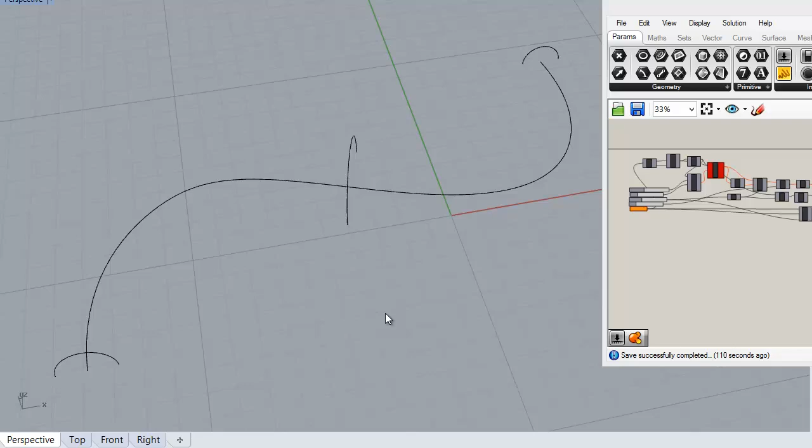Hey folks, you remember the reason I got into this in the first place was to create procedural snakeskin that was fast and quick to apply to any surface. So anyway, I've built the controller for it using Voronoi meshing, which has the nice side effect of it really looks sort of reptilian. So while it's not technically snakeskin, it definitely does look a bit reptilian.

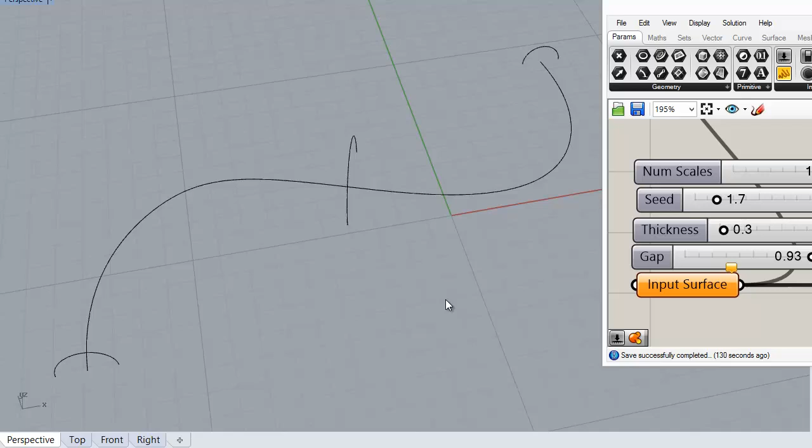Right, so let's carry on with showing you how it goes. So I'm going to just sweep one rail with these curves, and let's say that that's going to represent our snake body, lizard body, reptilian, whatever the hell it is. Alright. Of course now we need an input surface, so I'm just going to plug that in there.

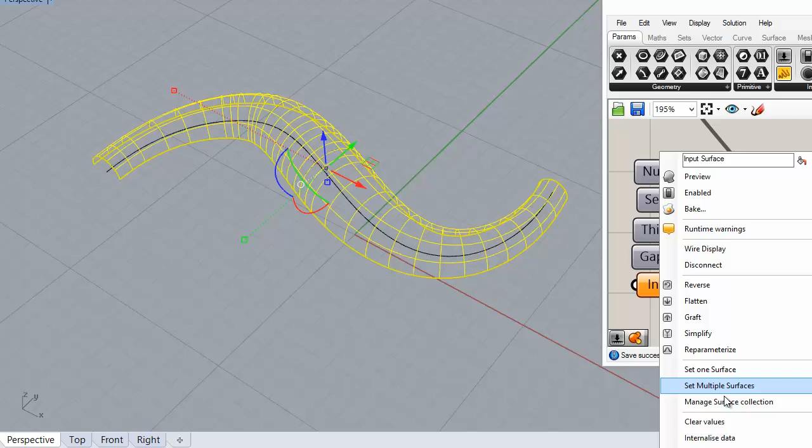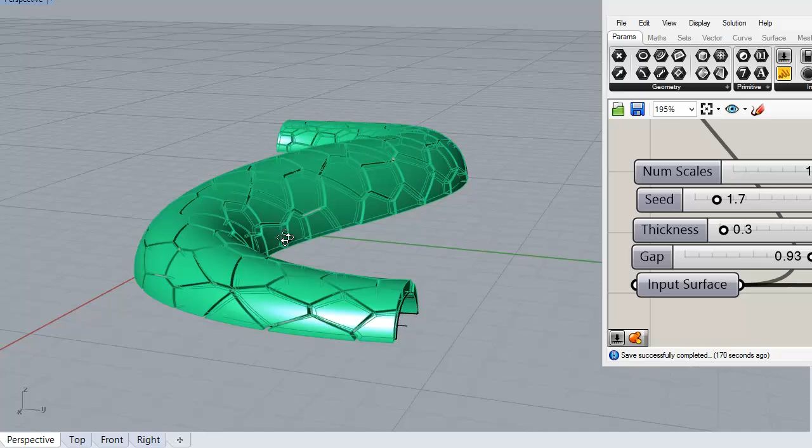Give it a second. Alright, now what it does sometimes, I'm not entirely sure how to control this, is if it flows it towards the inside, just flip the direction of your surface so it flops it around the outside. Alright, and I'll give you a little bit of info about how the builder works.

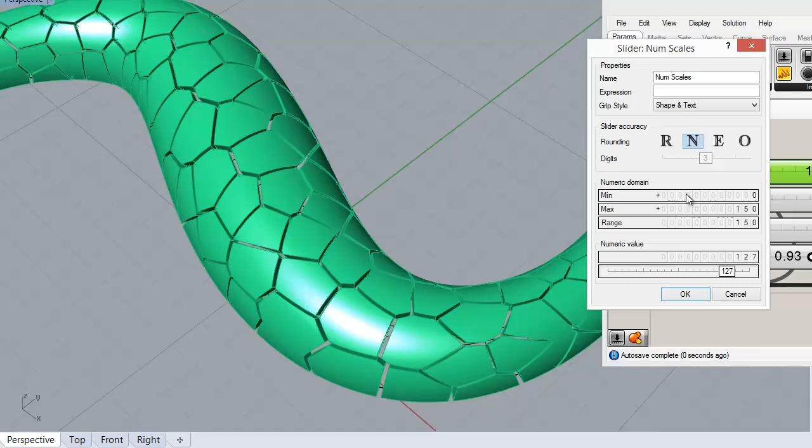So of course the number of scales is the important thing, but the more scales you use, the more work there is and the slower this builder becomes, so you need to just be a little wary of that. I'll show you what I mean. So if we set the maximum range for this to 250 and then try to drag this up that high,

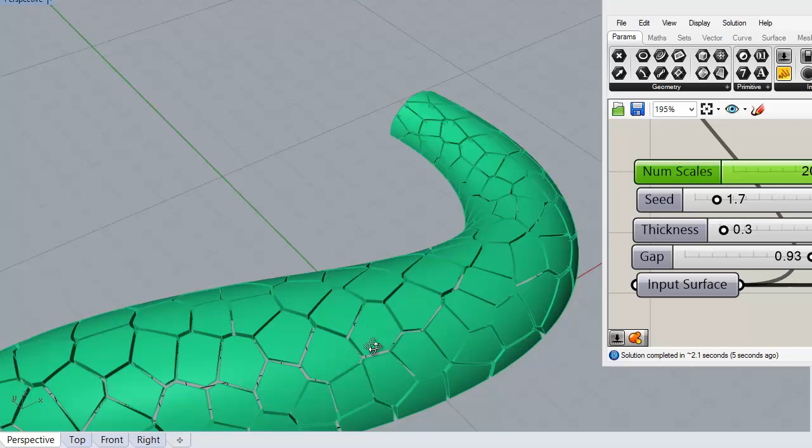it is going to get nicer in that you're going to get far more scales and it's going to definitely look a lot more snaky. But of course, because now there's more bits and pieces that have to play the game together, everything's going to be slowed down a lot.

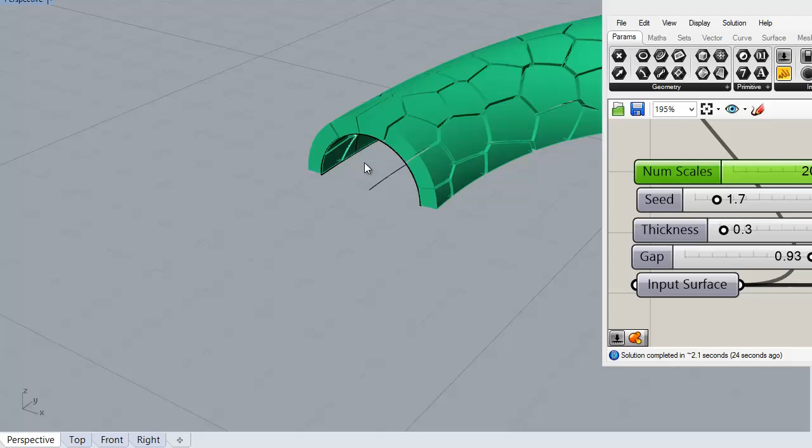Alright, so anyway, other parts of this controller is thickness, so you can determine the thickness of the build, and then a random seed, which will just randomly draw these lines in different directions. I'll see if I change it to something else. If you watch what happens on the screen, you see it just changes the way that it's drawn. Come on.

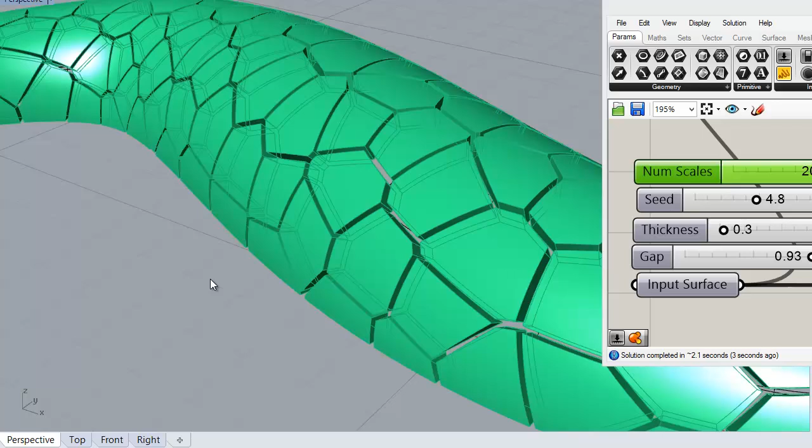It's literally just, for those of you who understand random seeding, this is just a different seed for the way that it lays out the initial grid that it's using to create this procedural snakeskin, or reptile skin, whatever the hell it is we want to call it. And then of course there's the gap. The gap works on a percentage of the original size of the scale. Each scale is represented as 100%, and at the moment the gap is the scale multiplied by 0.93.

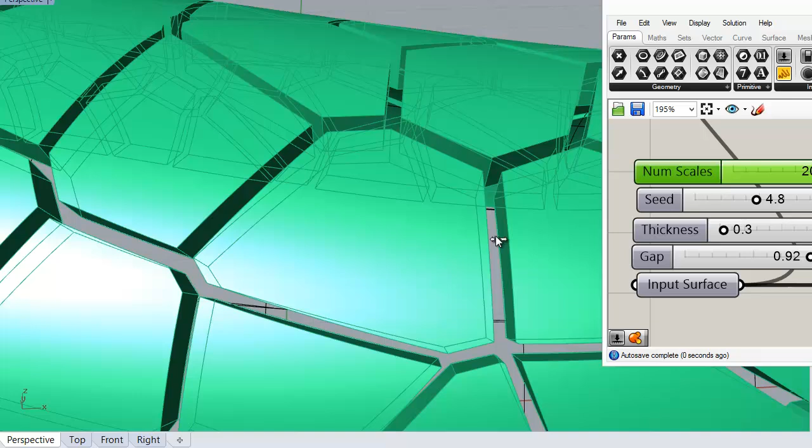So if I bring that down, the gap's going to get bigger. So you may want more gap, less gap. You might want to take it over to 3D Coat to give it a wish wash and make it look more sort of, I don't know, reptilian, whatever the hell it is that you're after. For the projects that I built this for, it works beautifully.

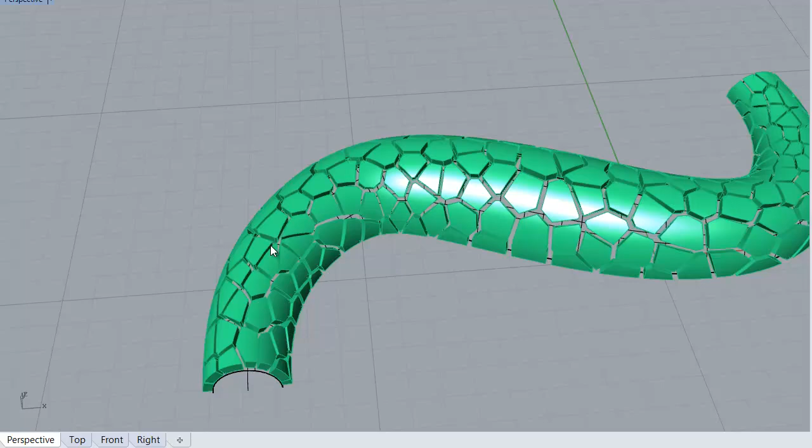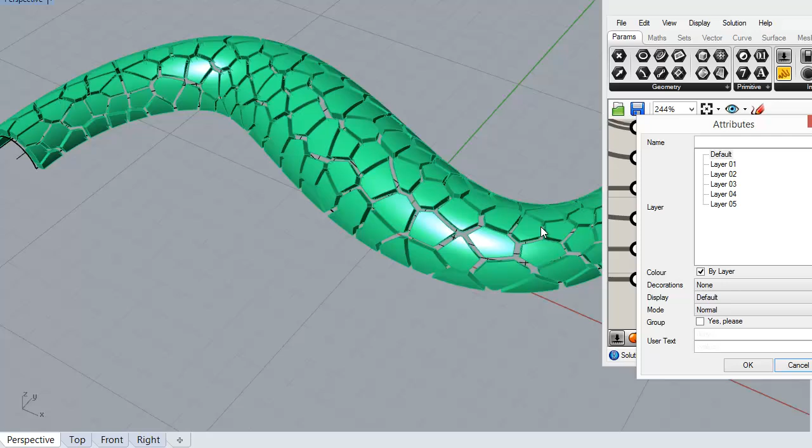Okay, and you get a nice random organic. When I say random organic, if that's even a way of saying anything, you've got something that you can work with that looks organic, although it's procedurally drawn. Anyway, so it was a bit of fun playing with that. Let me bake this so you can have a look at, let's bake those goods and close this down.

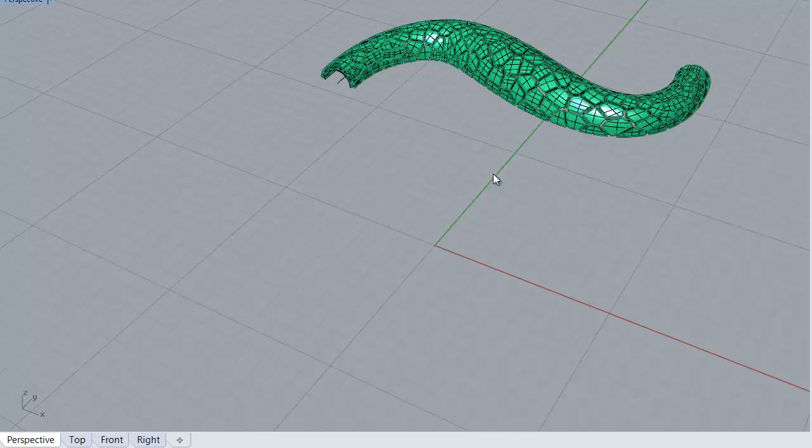File, let me just save that document and close this. Right, let's grab our goodies out of there. Come on. I moved my surface. Let me just move my surface away in a second. Of course, what it's done is it's moved my made up scales along with what I just baked. So let the made up scales just run away quickly. Alright, and then there's your Rhino scales.

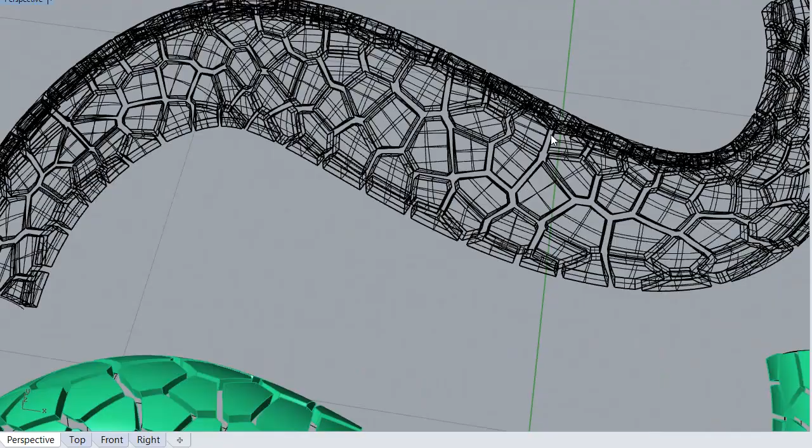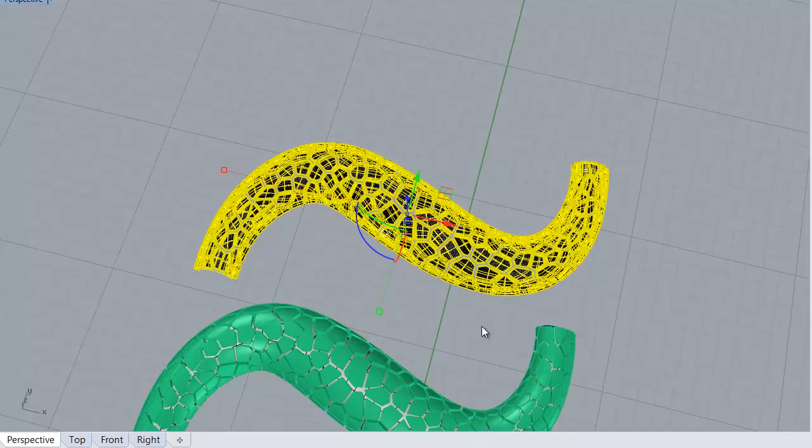So you could take those into 3D Coat now and you could give them a bit of a wish wash. You could try meshing it out in Rhino and see how you go. Let's have a look if Rhino Smooth will even that out. I haven't actually tested this myself. I literally finished this a couple of minutes ago. Okay, let's dump those and let's run a Smooth on them.

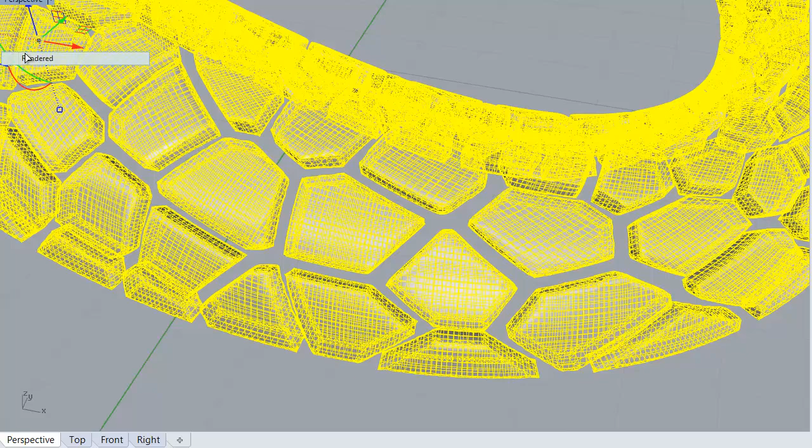Again, and again. Just render up that viewport. Yeah. I reckon if you took that into ZBrush or into 3D Coat, you'd have beautiful procedural snakeskin.